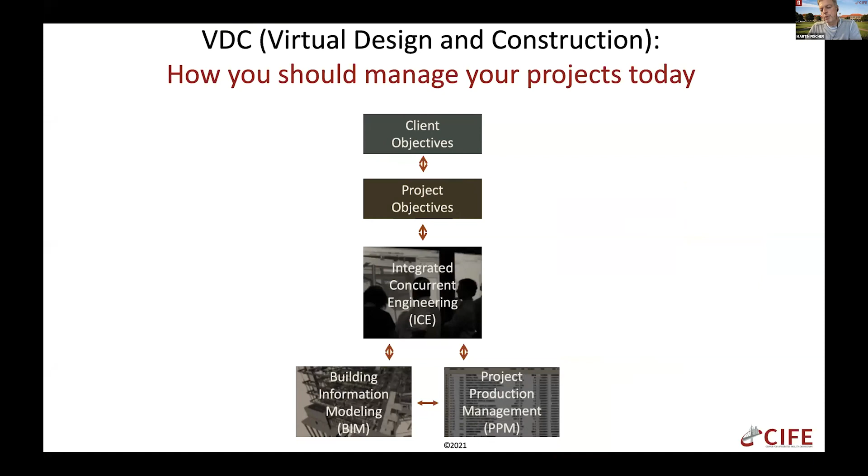So as we have seen in the last few years, I think almost all the successful projects I'm familiar with were managed with something like a virtual design and construction approach. So we really believe that VDC is how you should manage your projects today. Because as you know, it combines the objectives of the client and of the project team with how those are achieved through integrated concurrent engineering, project production management, and building information modeling. Or put another way, it combines the management of objectives, people, processes, and information. And lately I've been asked a lot, what's the difference between BIM and VDC?

Since in many parts of the world that still seems to be considered the same. But it's not, right? BIM is an absolutely important part of VDC, but it's just a part of VDC. So if you run into somebody who believes BIM is the same as VDC, just ask them: to be successful in a project, all you have to do is manage the information, right? They will most likely say, no, we have to do more than that. Well, then that's the difference between VDC and BIM.

VDC is a project management method, and BIM is, in my mind, an information management method. Absolutely important for a successful project, but not enough. And so that's how I simply explain the difference between BIM and VDC.

I found it extremely helpful to be able to talk about a VDC implementation really rapidly. Of course, any rapid summary omits important detail, but the point is you want to be able to convince others to pay more attention to it. And for that, you need to have a quick story. So I will illustrate a couple of quick stories, and then I will share an example of VDC that hasn't been shared so much, and then also reflect on what it means for design and construction managers.

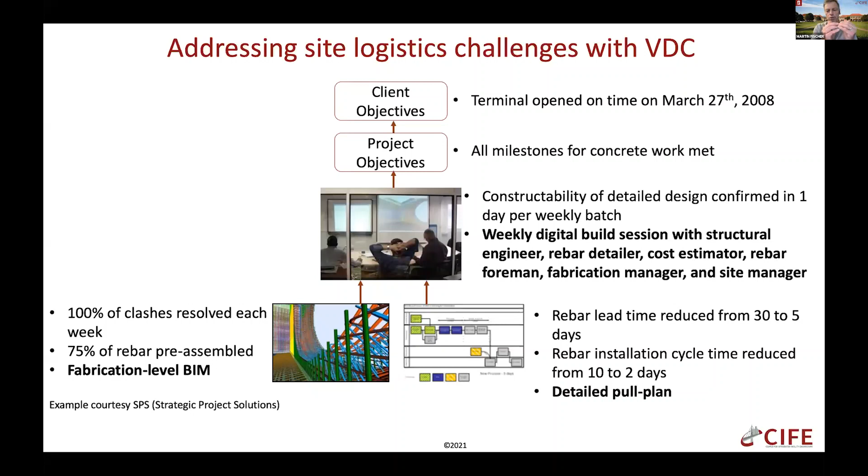So here what you see is the application of VDC for a particular task, where things are really quite close together in terms of detailing, fabrication and installation. But we also see VDC applied to connect design and construction at a wider scale. A couple of years ago, we helped a project developer, development team, architect and builder in the very, very early stage of a project. They were still trying to figure out the right design of the project to align the developer, architecture, and construction perspectives.

This was on an office building project in Warsaw, Poland, but this was done in our lab at Stanford in a 3-day work session. So here they really were concerned. This is very early in the project, so they're still also working out what are the right objectives.

So that's why you see them a little bit more vaguely here. They wanted to create a market-ready office building completed, I don't know whether that date is still okay, by May 31st, 2022. For that, they needed to build an office building with maximum flexibility in terms of office configurations, but also possible reconfiguration from office to, say, hotel or things like that, on budget and schedule. So they really needed to understand the implication on budget and schedule from different design configurations and different construction strategies.

So in this 3-day ICE session, they wanted to explore all of the design and construction strategies that the different participants could come up with. And then they measured the number of developers, architects, and builders approving a design and corresponding construction strategy. And ideally, they wanted to have 100% approval for the good ones. Or they were hoping to get to a strategy or several strategies that everybody would say, yes, this is okay from my perspective.

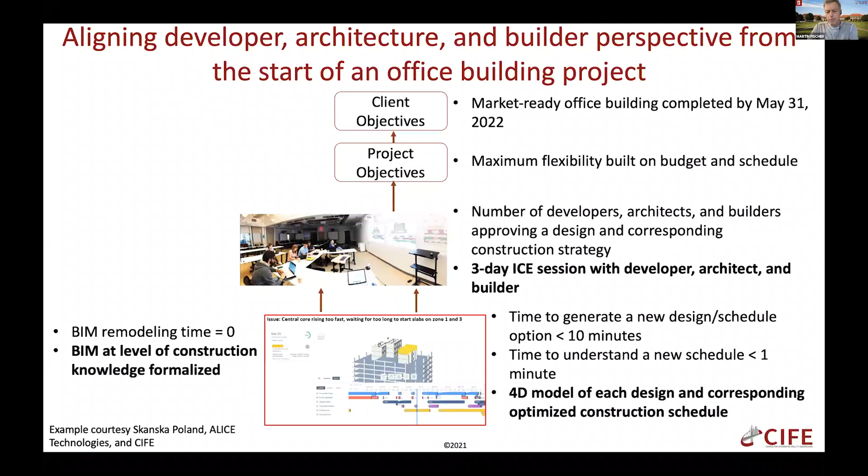So I want to share an example that hasn't been shared so much because it points to an application we see more and more of, which is exploring and enhancing the use of prefabrication, but really in support of client objectives. So I think this is a nice example in this respect. And then I will reflect again on changes that it means for these people managing design and people managing construction. So here, this was for University of California in San Francisco. And the example was shared with me by DPR Construction.

So from a client perspective, this building is bringing together psychiatry, neuroscience research, and clinical outpatient care, and really drives advancements in new treatments for disorders of the brain and nervous system. Basically, a really new kind of building, bringing this type of research together with many different kinds of labs and technologies for research, focusing also on patient experience, more so than just the efficiency of providing services and research, and basically turning UCSF into one of the largest neuroscience research centers in the world. So that's sort of the ambition of the client for this project.

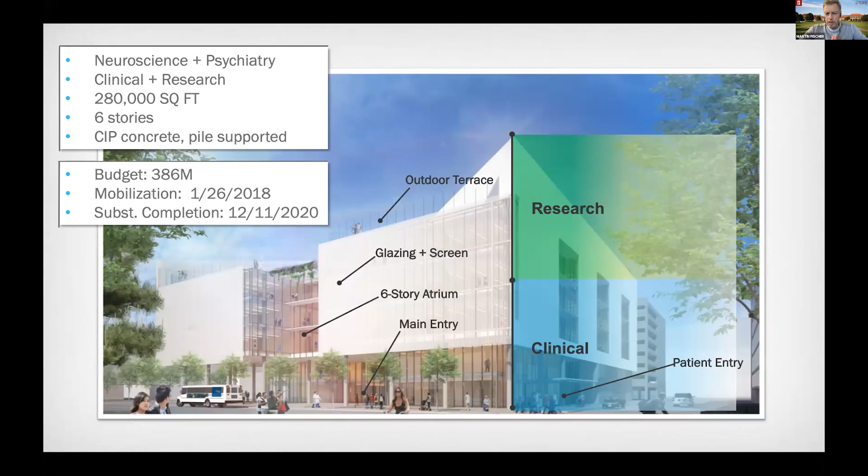Here you get a sense of the project in terms of scale. Pretty good size building, quite heavy budget, as you can imagine, for this type of structure. So basically a 6-story building in an urban setting. This project had a construction management at risk agreement, but with lots of integrated project delivery language. There were incentives included. Several of the trades were done with design build and many others with design assist. So there was, at least contractually and organizationally, quite a good focus on bringing design and construction together.

A collaborative big room environment was set up, and BIM was the main contractual deliverable. All the 2D documents that were still needed for various purposes were created from the BIM, not the other way around. So that was a bit of the context. One of the main challenges for the project was a high labor shortage for the technical trades, which then has a chance of leading to low productivity and therefore high costs. So one project objective for the project team was that they didn't want to have detrimental cost impact from labor shortages, and of course, also no quality reduction. So they explored prefabrication across all trades by robotically fabricating interior partitions offsite.

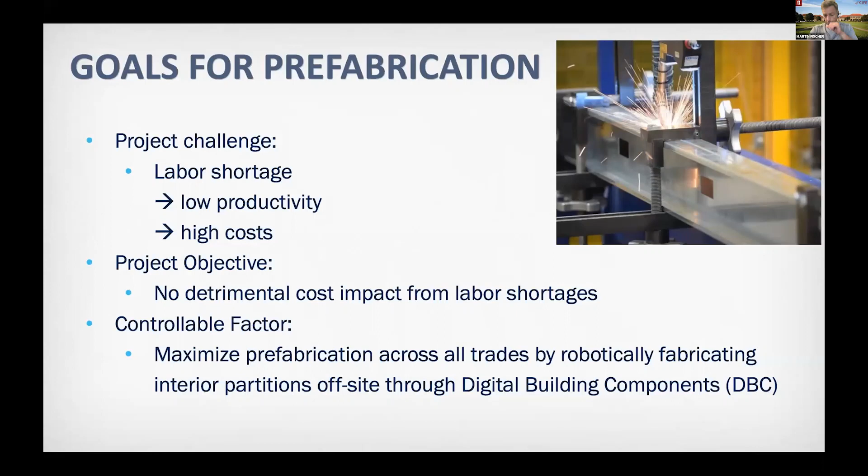So they had several forces for and against this plan. There was definitely some experience with VDC and prefabrication by the general contractor, by the mechanical plumbing partners, and significant offsite fabrication for plumbing systems had been demonstrated on a recently completed hospital project in San Francisco. But then there was limited specific experience with respect to prefabricated interior wall assemblies. And there was concern about the panel sizes and weights given the urban setting.

And the installation around the whole coordination of the mechanical electrical piping work was a concern, because it's always a challenge, right, on a technically complex project in terms of finishing the interior work, but also the utilities and how you sequence that. In addition, there was a very high sound performance requirement, which the project team had to pay a lot of attention to. Probably something I should have listed earlier.

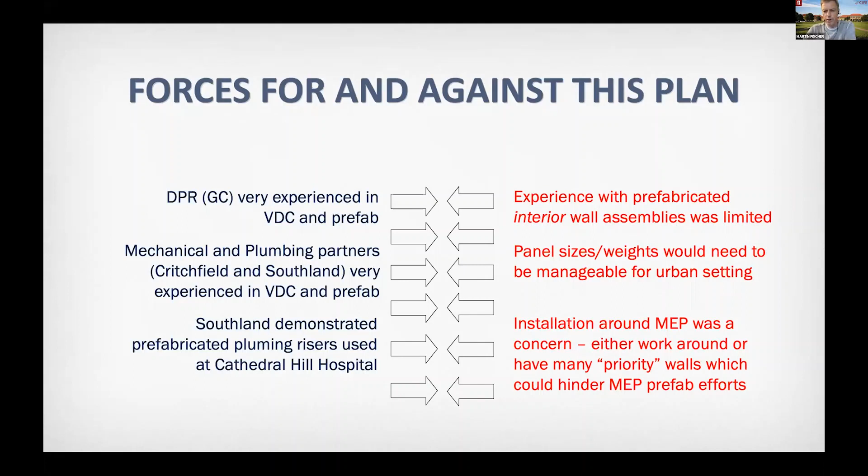So the team came up with this idea of a prefabricated partial height wall. So to prefabricate as much as possible of the interior walls, but not impede the space that's needed horizontally, right? It's always this tricky thing. How do you make the horizontal and the vertical work efficient and productive?

And so here they had the idea of partial height walls to maximize prefabrication of the vertical elements as much as possible without impeding the ability to also fabricate the mechanical electrical piping work, a lot of which is installed horizontally. Because before they always had to sort of choose one or the other. And this also then simplified the work, as you will see, enabled offsite mechanical piping rough-in, actually also electrical.

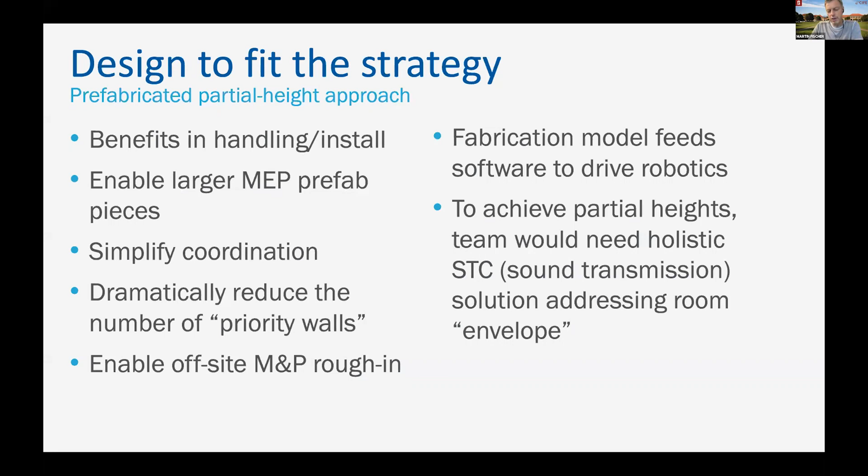And in a way it forced them, but also enabled them, and everybody saw the purpose of creating fabrication level BIMs that fed the robots that made these walls. And it also forced them, so to say, to really pay attention to the sound transmission, this STC requirement, as it's called in the US.

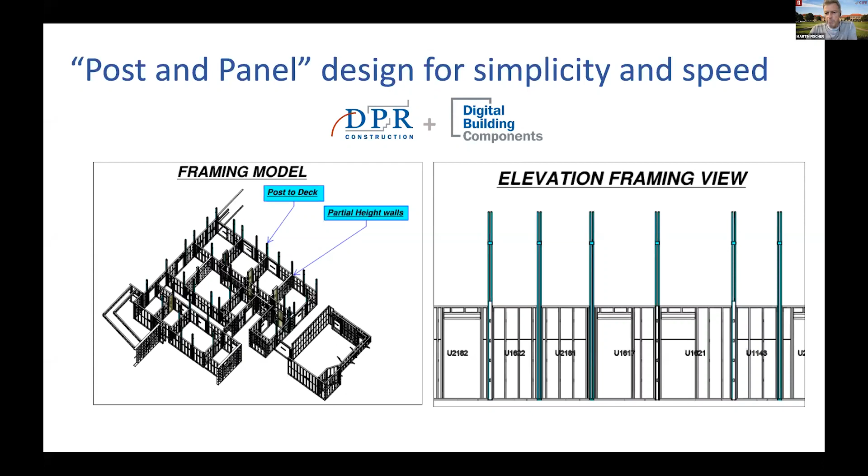So here's what this looked like: by fabricating these partial walls and then connecting them with posts to the ceiling and the next floor, they left this space here open for bringing in prefabricated horizontal mechanical, electrical, and piping assemblies. And in this way maximized the efficiency of installation and also simplified the work for all the trades.

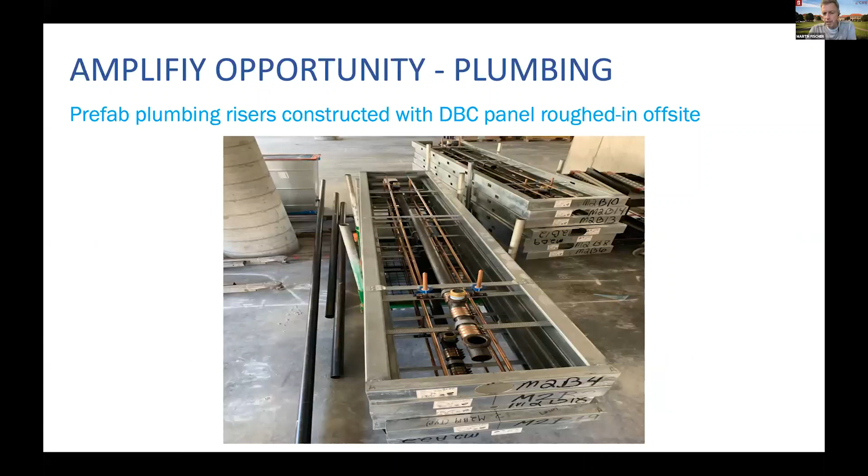So here is what, for example, this offsite fabricated vertical plumbing looked like. And then they also roughed in the electrical work at a nearby production facility.

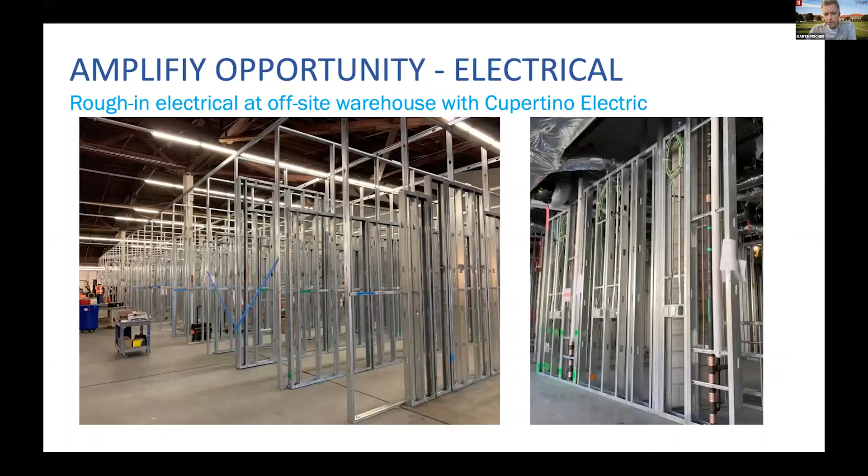They had to meet this STC 45 requirement, which is quite a high sound transmission requirement, which they were able to also model and simulate to see where they needed to avoid sound transmission openings, so to speak, and how prefabrication could minimize those openings, and what other choices they needed to make so that the sound transmission was not somehow imperiled by the construction strategy.

So they then eventually were able to show with field tests that their simulation and their design was okay, other than the doors. They also showed that the electrical rough-in work was the simplest kind of electrical work, so-called NECA 1, classified in the US. In the field, it would have been much more complex work, which wouldn't work with the labor shortage.

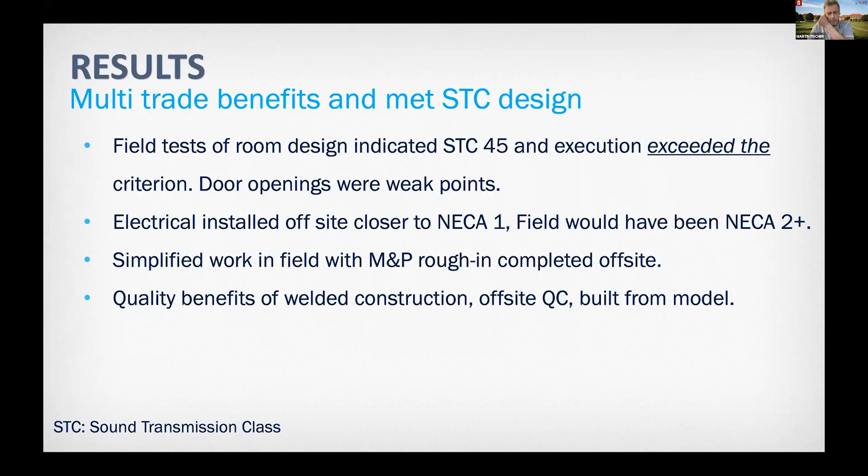They also simplified the work for the mechanical and piping rough-in, and ended up with higher quality. So they could use less labor that needed to be less qualified and still produce high quality work on schedule and budget.

So to put this in the VDC framework, as you saw before, the client wanted to create a world-leading research facility by combining psychiatry and neuroscience. So a project team had to build a world-class building, for example, with very low sound transmission on budget. So the team had to, in weekly ICE sessions with the owner, architect, structural engineer, GC, and mechanical electrical piping subs, confirm the prefabrication of interior walls with STC 45 and NECA 1, simple electrical tasks.

They had to create a fabrication level BIM that enabled robotic pre-assembly and offsite electrical rough-in, and that also integrated the offsite fabrication and sound performance requirements, so that they could prefabricate 80% of the partial height walls, or 80% of the walls in the building were partial height, and 80% of the mechanical and piping were pre-assembled.

And they also, in the process, had to figure out the sequence that didn't have obstacles for MEP rough-in on site. So we see this kind of application of VDC more and more. It's kind of in between the two spans of design and construction interaction that I've shown before.

And I see this concern in many parts around the world where it's increasingly difficult to get skilled labor on site. And it's necessary to create high quality constructions that are performing in many dimensions with less skilled workforce. So I hope you found these three examples illustrative in terms of giving you ideas for your own VDC application or future research.

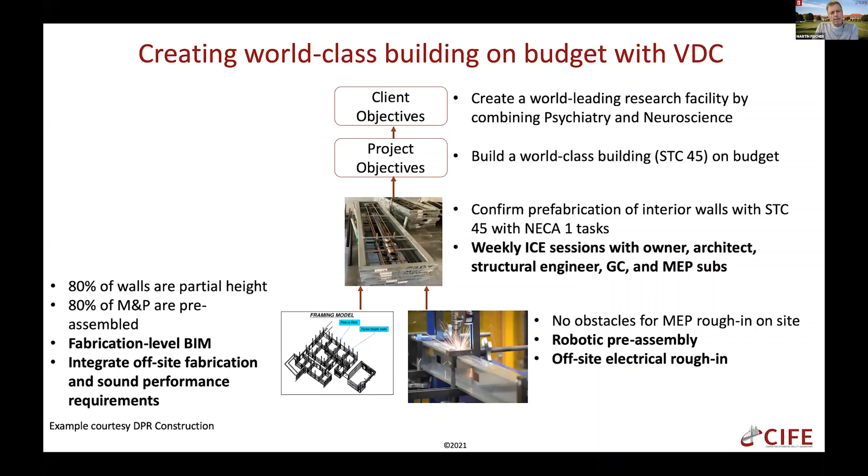As I was reflecting on this, and I briefly showed this at the launch of the Red VDC a couple weeks ago, but I thought it's worth reflecting on it again. I realized that what we are asking projects that use VDC to do is bring together people that are familiar with design management with people that are familiar with construction management, because we're bringing really the two perspectives together.

But if you think about it, design and construction managers, as you will see here, actually are used to quite different mindsets and tool sets and objectives for their work and what they need to be good at. If you want to be a good construction manager, you have to be really good at dividing and conquering work, because you have to break up construction work into chunks and install it in parallel or sequential workflows. If you're good at that, you have a good chance of being a good construction manager.

You have to be schedule driven. Of course, also very safety, quality, budget conscious, but there are very clear milestones and targets for your work. So construction managers are used to clear and common performance criteria: safety, quality, schedule, cost criteria. It's fairly clear completion goals and criteria. You can see work is done or not.

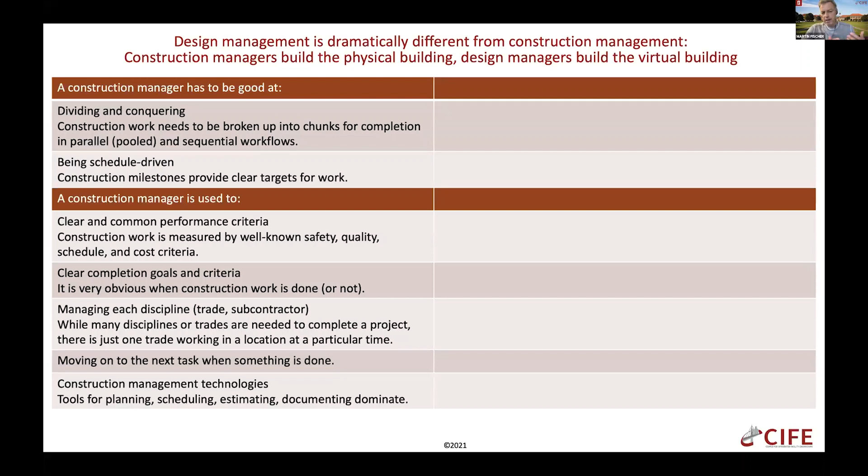They're used to managing each discipline. Of course, you need to manage many disciplines, but at any one time at any one place, hopefully you only have to manage one discipline. If that's not happening, then you were not good at dividing and conquering. And then you need to be good at, or used to, just moving on to the next task when something is done. And tools are planning, scheduling, estimating, documentation tools.

If you think about what a design manager has to be good at, a design manager has to be good at integrating the work from different disciplines, architect, structural engineer, many others, builders also, and has to be solution driven. You have to look at many different solutions, have to be exploratory to find good solutions. So a design manager is used to trade-offs between performance criteria, because there are many performance criteria they have to meet, and it's almost never possible to meet all of them 100%. A good design manager has to be used to dealing with these trade-offs.

They have to be good at dealing with open-ended work. How do you know when design is complete? Maybe if you did one more version, you would find a much better solution, or maybe this would be a total waste of time. You have to manage multiple disciplines all together. Design managers keep thinking about the design decisions they made last week. Maybe there is still something better out there. Moving on is not always in their DNA.

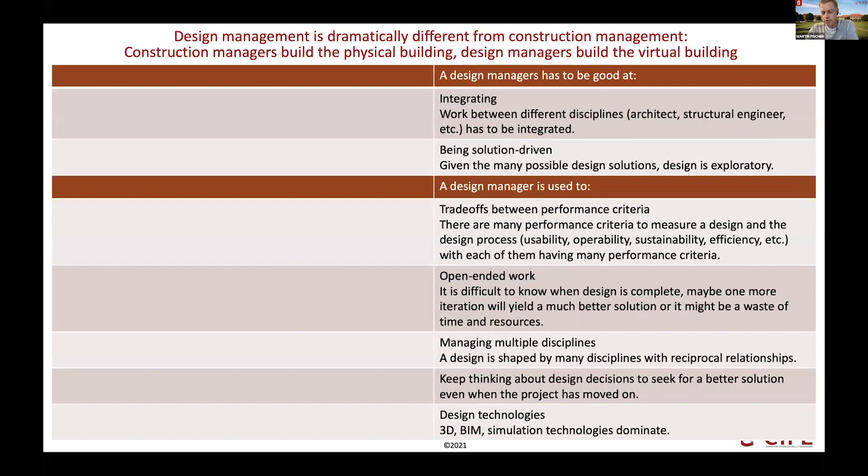And they're using quite different technologies compared to construction. 3D BIM simulation technologies dominate. Of course, now, with VDC practices, these two perspectives need to be brought together. And so in the VDC program, we are learning how to bring those two together. But we're also learning, if you're coming from construction, how do you think as a design manager? If you're coming from design, how do you think as a construction manager?

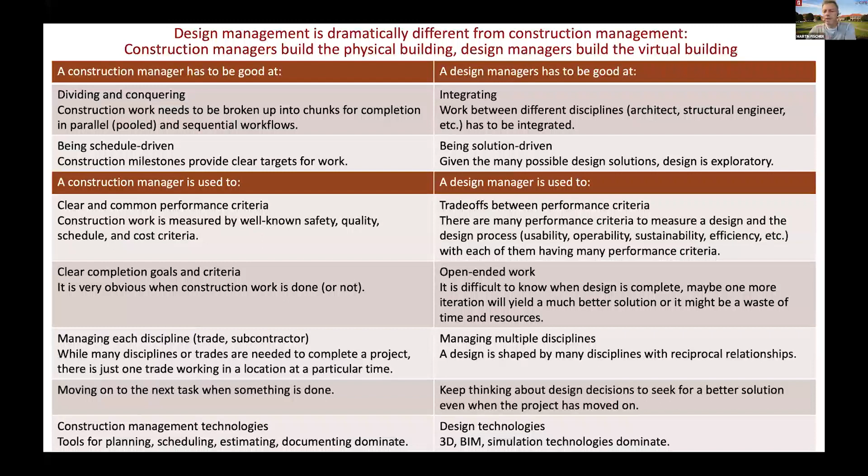Because as you noticed from this conversation, what the two have to be good at is actually quite different. And what they're used to is also quite different. Just look at, for example, the very clear completion criteria of the construction manager versus the open-ended work of the design manager, or the clear performance criteria versus the trade-offs, integrating versus dividing and conquering, and so on. But this is really, I think, a fascinating time to be in design and construction, because we can now, with VDC, bring these two perspectives together, which allows us, as you've seen from the example, to create much better solutions than if we treat them separately.

And I think this is basically a summary I just provided.

So to give you an update on the global effort: after certifying from 2009 to 2020, together with SPS and PPI, 857 professionals in small groups, we have been able, with the support of many universities around the world and the Stanford Center for Professional Development, to reach many more practitioners in several markets, with the first of these large programs.

Done in Norway, and we will hear from Elif, my partner at NTNU there. You've already met Alexandre from the University of Lima, and you will also meet Peter from Switzerland. A big thank you goes to the industrial mentors and experts like Omar, and many others around the world who have given their time to guide this new set of students through what we call large-scale VDC programs. It's also providing very interesting and unprecedented access to data on projects for research that we haven't seen before.

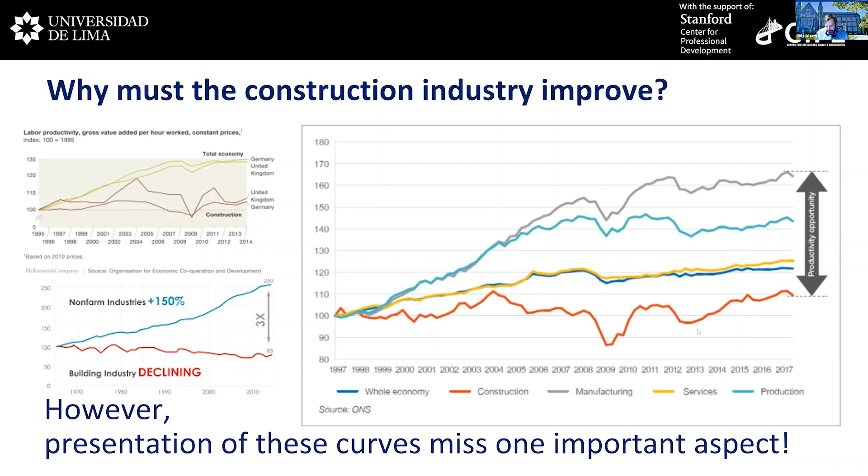First of all, I guess you have seen these presentations before, showing that the construction industry is so bad, although it is that good. And in a way, we start believing it, that nothing can improve our construction industry and it is miserable. However, when you look at those figures, I do think one important aspect is missed. And that is, if you see the improvement, the capability to improve, the construction industry is, from my point of view, the world's most dynamic industry.

And we have to have better processes to face the challenges we see related to sustainability and also to the complexity and size of projects, as Alexander presented, and also the use and utilization of digital technology. So there I do think that VDC and the focus on the process and utilization of digital tools is very significant. I do think that we have enormous potential, and it's important that we can show that the construction industry can be a part of the solution, especially related to sustainability.

There's also the challenge about rolling out something, implementation of something. And when you go back to John Kotter and his 8 steps of change, they start very softly: you have to do some steps about awareness, but you don't get the proof. And when you work in the construction industry, you know that we are really practical. We want to see the evidence. We want to see the proof. And if you start a process in the construction industry with this strategy, I do not think you will come to see step 3 before it stopped.

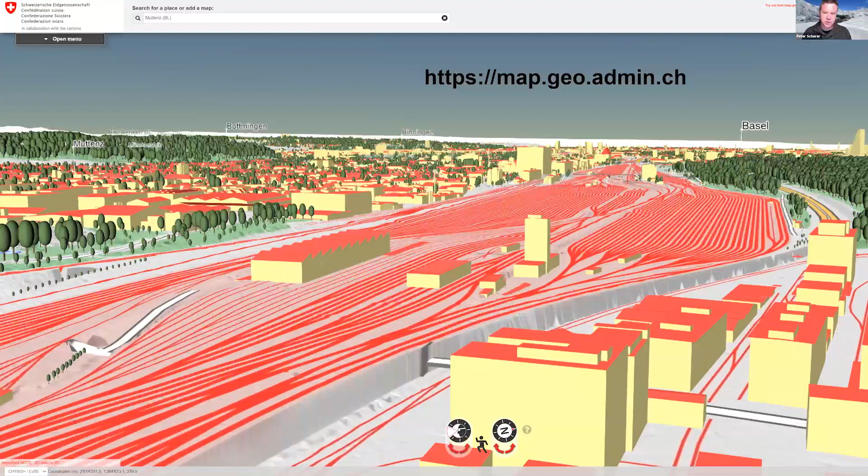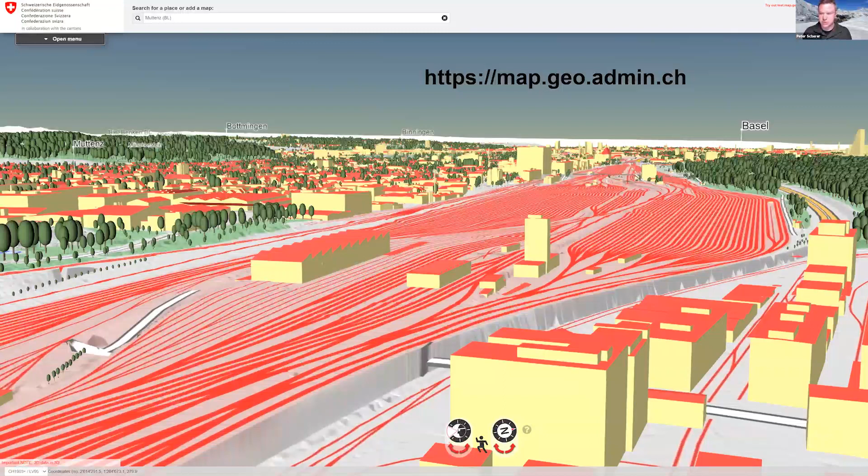For myself, I work here in Muttenz, that's close to Basel in the northwestern part of Switzerland. And as you can see here, if you click on the link, you can see that the whole of Switzerland is built in 3D. You can fly through Switzerland if you want to enjoy that. Every building is built in 3D, so you can apply it to any software you want and improve your project this way.

As mentioned in every presentation, and Elif said it, regarding productivity in Switzerland and especially in Europe, we are all facing the same problem. As you can see, Switzerland is in the upper third in Europe, but we have not seen much increase in productivity in the past 20 years. So how can we bring productivity up, and not only in Switzerland? Of course, we are connected to Europe, import and export wise. So we should work together and bring the construction industry forward. A few countries are better than others, but more or less we all have the same problem.

I would like to highlight one of the topics I see in Switzerland, but I think this is also a topic in other nations. The demographic development in Switzerland leads us in the next 10 years to a really important topic, in my eyes. That means we have to do the same amount of work with fewer people. You can see in this gap there is less workforce available to do the same or even more work. That means we have to improve our work and how we work together using digital technologies to have more impact with the same or less workforce.

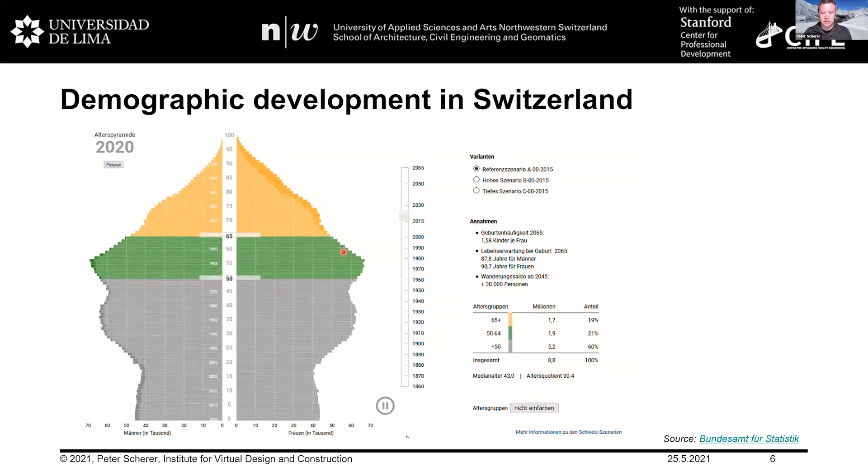For that, I think it's quite important to understand that digitalization or using VDC is not something that you should do. It's something that you have to do in the future if you want to work in a construction industry that does good quality work for clients. And as a client you have to understand that you have a demand for better solutions for working together. This is what's going on in Switzerland: people have to realize that what we are doing right now is not good enough. We've seen tremendous challenges from climate change and for our economic system in Europe, but also around the world.

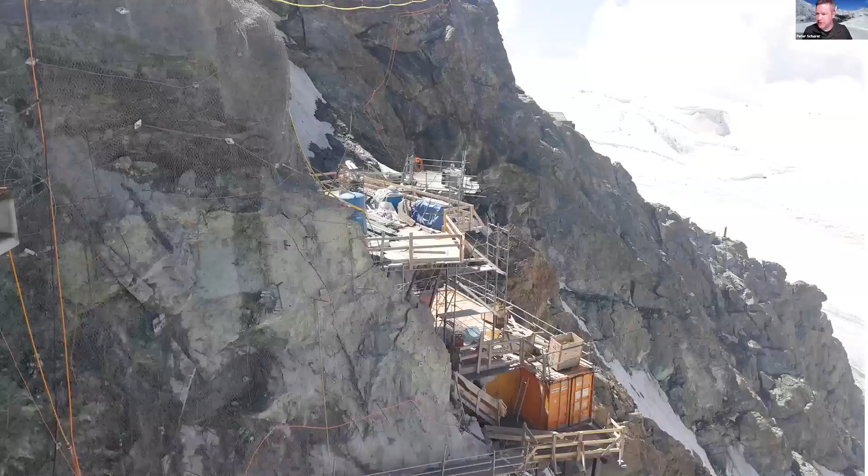One more picture: that's the way they do formwork, or at least how they prepare it, and they place concrete like this when it comes to the formwork. So that's one, maybe not typical.

Often they are building new cable car stations up in the mountains, but one of the main challenges in Switzerland is to provide data centers for the Swiss banks to get enough capacity for storage and computing. This is a growing business in Switzerland, as we saw in the past years. As our country is neutral and politically stable, and located in the heart of Europe, building these data centers is an important part of the construction industry. That was also one of my personal experiences in the past 20 years, when I was practicing VDC without knowing it.

Of course, not in the full framework, but some parts have been quite important to me to have it also in my professional work. So I was a construction manager building these data centers to ensure that all the traders from the Swiss banks are able to do their work, and not only the human traders, also the machine traders. As you can see here, they have a lot of screens doing decisions while they were trading.

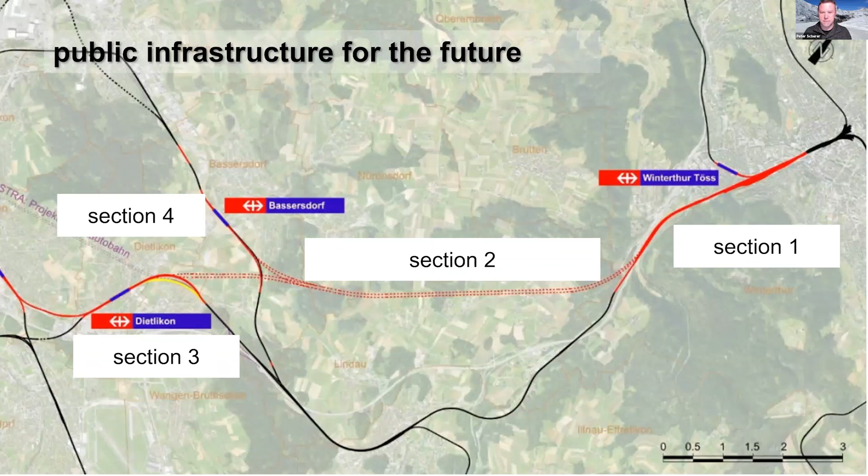And as you can see here, to optimize this transport line from the public railway, they have plans to build a tunnel, which is more in the direct line of the traffic, and that allows it to be faster and take not so many curves as we have here. So for this reason, they build a tunnel, and tunneling projects are quite important to build fast and also under reliable conditions. So that means, of course, the client has to be happy. So you have to provide this tunnel in time to open it on time when the next schedule change is there.

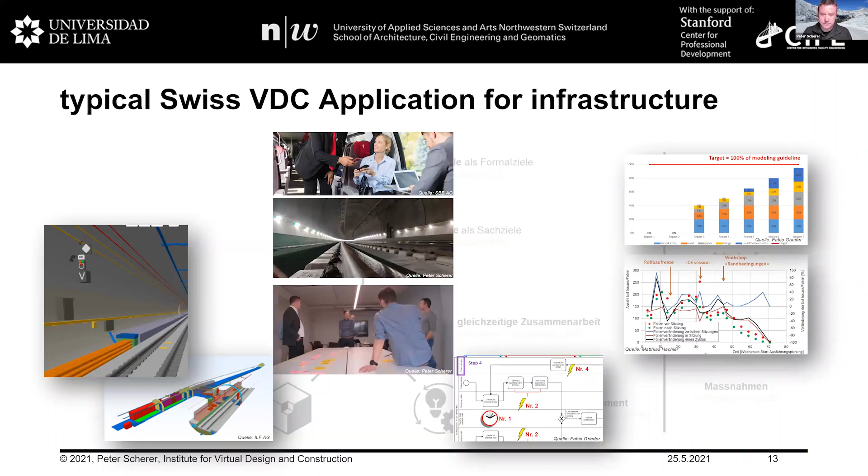And for that, you have to provide really accurate information. For that, of course, they use sometimes models. It's not so common to always have digital models, but sometimes they do. And to have, of course, accurate processes to collaborate, to engage the different stakeholders, and to bring them together to work properly on the same topic. And then if the tunnel is finished, it looks quite impressive to stand in the tunnel. Here you have a tunnel inspection for the handover. There are no trains there right now, but they are looking for all the good conditions and see if everything is safe.

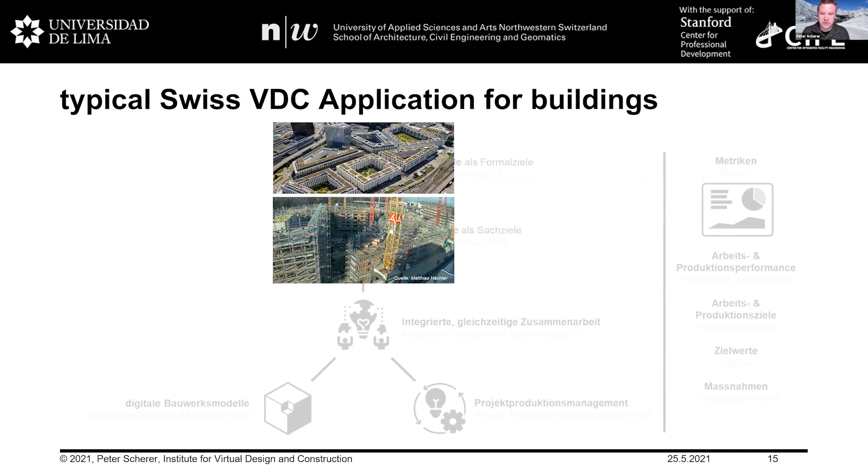So another typical VDC application is for buildings. A lot of areas in Switzerland are now built in a sustainable environment. That means working people and living people are in houses built in small areas, more in parks, together to ensure that they can work sustainably. And for that, they build different types of buildings close together. Of course, they have to be of good design. They're using digital technologies like BIM, but mostly in the design phase. So if you look at the construction side, there's not so much improvement as I saw so far.

Of course, there are a lot of companies focusing on digitalization in the construction process, but Switzerland is more driven by the designers. A lot of designers are focusing on BIM right now. They have started to see the added value of VDC by using ICE and PPM, but in most design companies, it's very common to just focus on BIM, which is quite a good start, but should be improved soon. And that's what we are working on in our programs, to engage more contractors, making them collaborate with the designers and not leave the designers alone by providing a solution which looks good for them. It should really be a benefit for the whole project and not only for the designers.

But as I will show you later, designers have a very strong community in Switzerland, and contractors are not so well connected to each other. They are more competitors or see each other as competitors. And I think that's one thing they can improve, to see each other not as competitors and more as enablers to demand their needs from the designers and to improve the way they work together.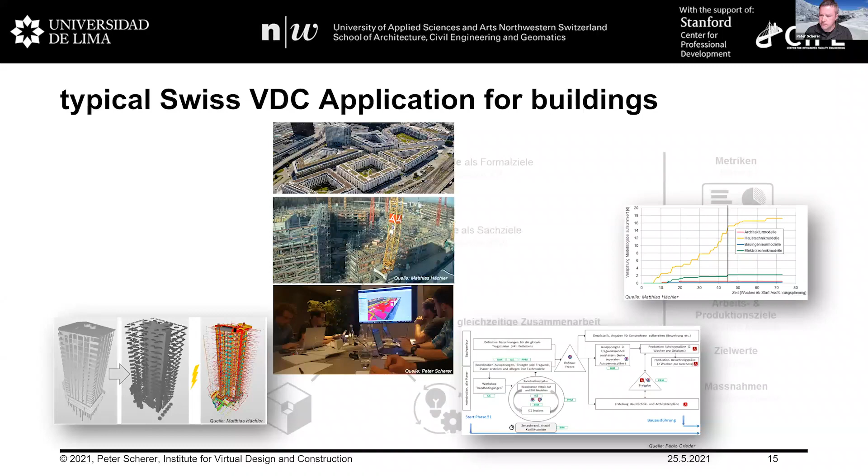These are a few numbers from the participants from Switzerland. In our large-scale program, which I mentioned, we have 60 participants, and 50% of them were designers. That means, as I said before, it's very design-driven, and designers have to lead now in Switzerland. There's a strong association called SIA, Swiss Engineers and Architects. They have, from my eyes, the lead about digitalization in construction. Of course, they try to bring things forward, but the processes established in Switzerland are quite strong. So that means design first, then we do a bit of tendering, and then construction comes into place.

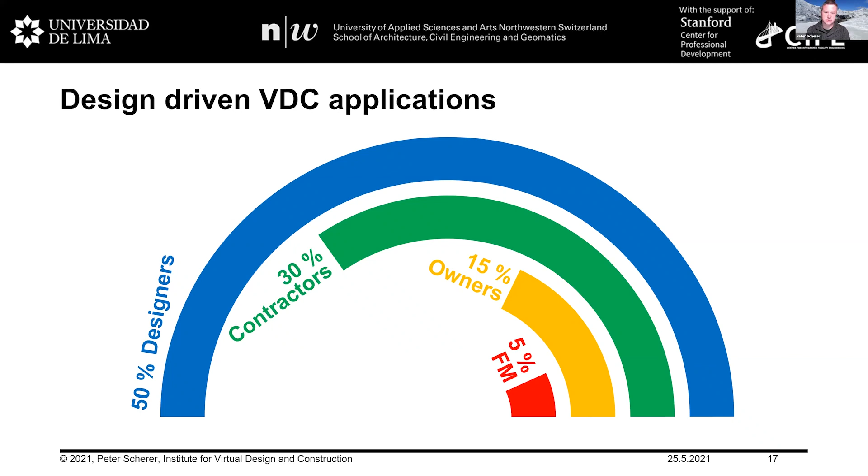So what are we doing in the professional education in Switzerland? We have this VDC program in place since 2013. We have around 250 VDC alumni since then, and they are really well connected between each other, but it's not so well connected, I would say, to the rest of the industry. So the idea and concepts behind VDC has to be translated, and one of the topics is, of course, to have different languages in Switzerland. That's one of the really major challenges.

We have the possibility to have 25 students per year in the regular master program, which is focusing on professionals. And we had the opportunity this year to have 60 additional in the certification program. So these are two ways to get the master degree for professional education in Switzerland. One is to have it in a regular study way, like you work 60% and do 40% study work, or you have this VDC large-scale program, which we offered last year first.

And what we see, and I think Elif also mentioned it, it's quite important to see VDC not as something that you can teach in the classroom. Normally, VDC education or education in Switzerland is looking like this: you go to a class, you get your knowledge, and then you do your exercise, your homework, and then after you did that a few times, you go to practice it. And I think this is not the way how you can teach or educate, enable people in doing VDC, because you have to do it and you have to experience, to gather experience while you are working.

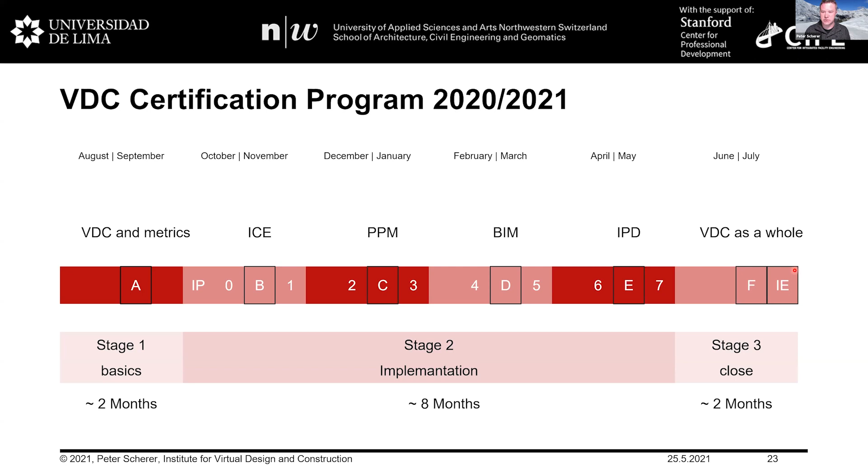As mentioned before, also from Elif, we have this goal to have a common language. For that, we built this VDC glossary in Switzerland. It's not covering all the languages in Switzerland right now, but at least it gives you the possibility to translate important English terms from VDC into German. For now we have two languages, and it would be really great to connect this to the initiative in Latin America, and of course to Norway.